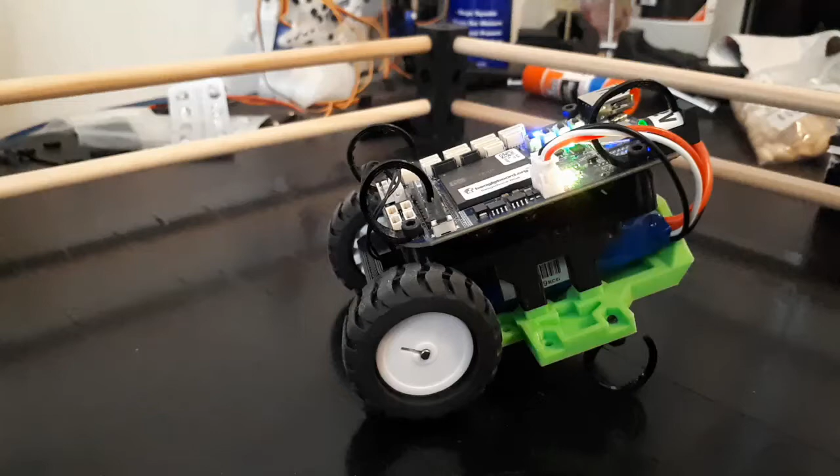Hey, so today I'm going to do a control test on this robot I've been working on for quite a while. So this robot's a pendulum bot, and what that means is the idea is that it's going to try and balance itself in an upright position. So this pendulum, and there's a few challenges with doing that. But today I'm just going to show you some really basic proportional control that I've been working on for quite a while.

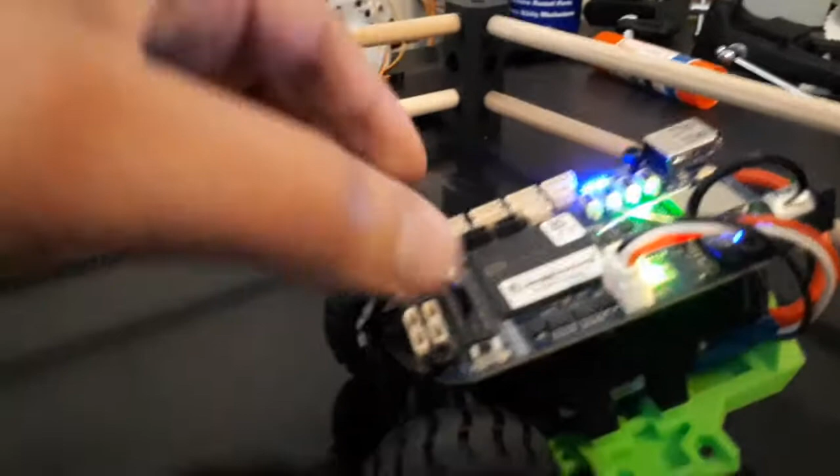The robot's based off a BeagleBone Blue, which is basically a little Linux computer with a bunch of robotic outputs. It's got an IMU on it, so it gets gyroscopic, accelerometer, and magnetometer sampling from that. And because it runs off Linux and it's kind of from the open source community, there's a lot of nice Python libraries that go with it. So most of the code base that I've written for it is all Python based.

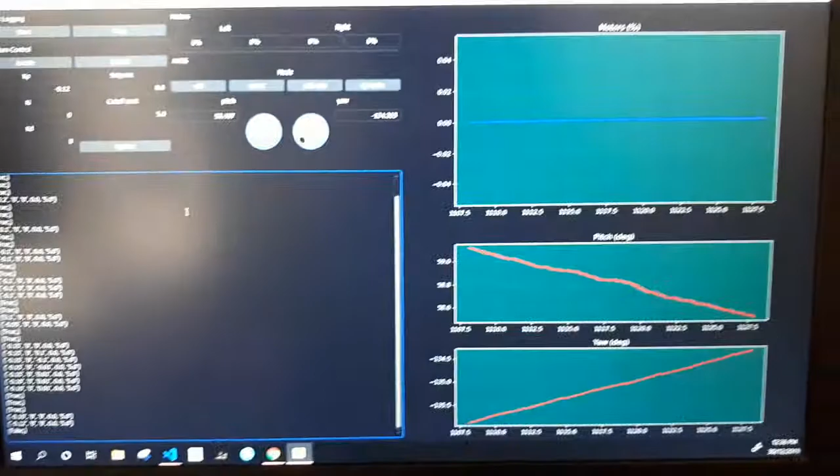So the first thing I'll show you is this nice kind of Python GUI that I've got going here. It shows in this plot here the motor outputs, which is very useful for comparing against the pitch and yaw angles when we're trying to control it. At the moment, all we're going to be controlling for is pitch. So this is pitch here, and yaw is more in this direction.

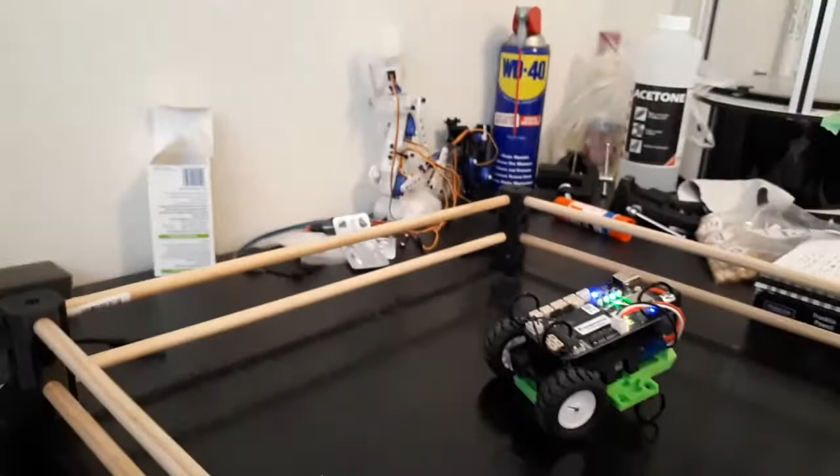There's some really nice kind of Cartesian mathematics that I've put into it with some matrix transforms and so on to make sure that whatever angle this is at, for example, it always knows what its yaw angle is with respect to the rest of the world. And that's required because the IMU is on the robot itself, so it needs to take into account how it is actually oriented with respect to the rest of the world.

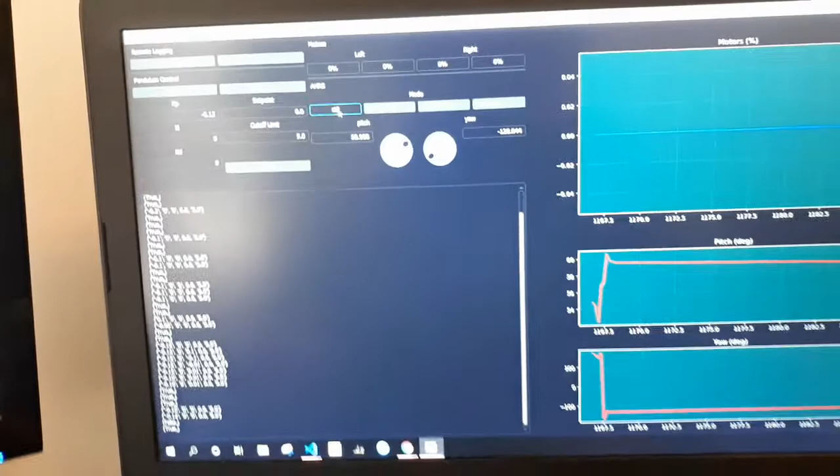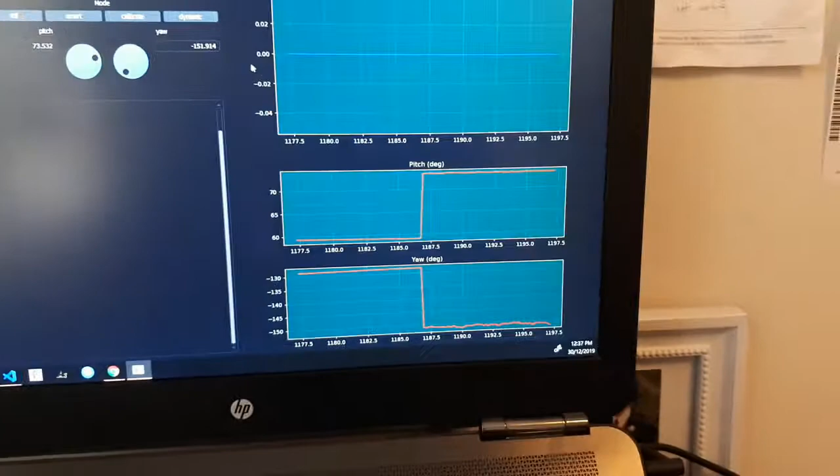And there's a few little modes here for calculating the angles. I've got the still mode, and you've seen here it just jumped, and the reason for that is that in its dynamic mode, when it's actually trying to do some control, there's a little bit of drift, and that's just from integrating over the gyroscopes. So the still mode then goes, hey, I know that I'm still, therefore I can use the accelerometers to determine what my actual pitch is. So it kind of takes advantage of some additional knowledge.

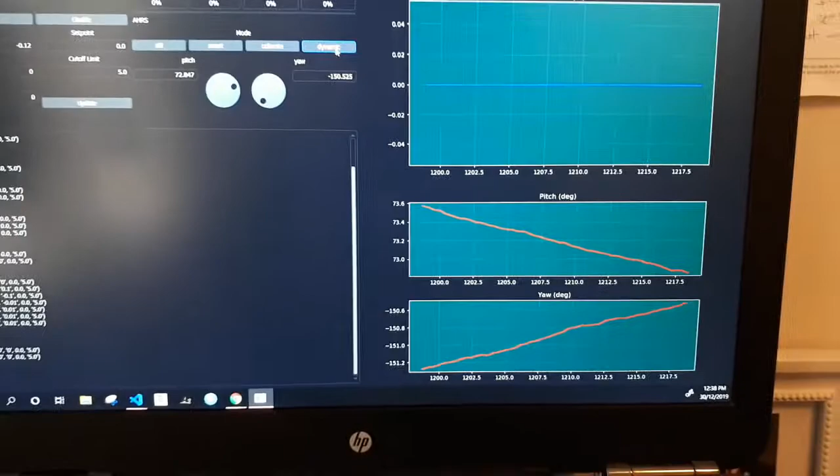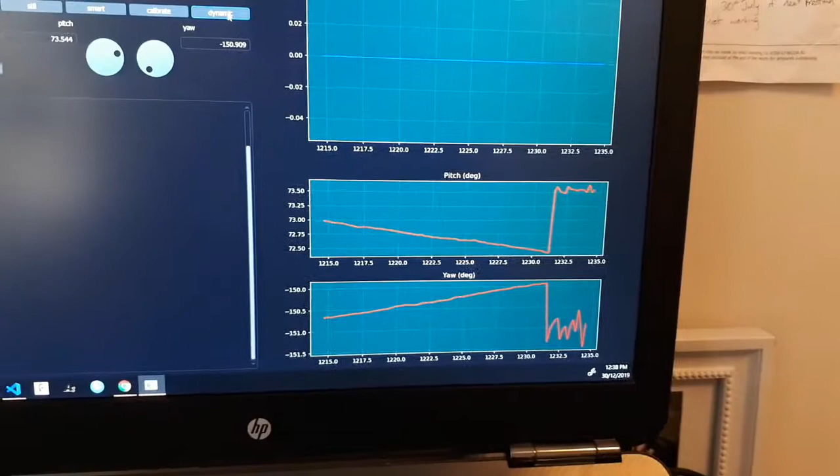So you can see that drift now. So I put it back into dynamic mode, and now it's slowly drifting away from what its true angle is, even though the robot's completely still. And if I put it back into that still mode, it would go there again. So you'll see through some of the tests I do, I might put it back into still mode just to kind of zero that angle in a way.

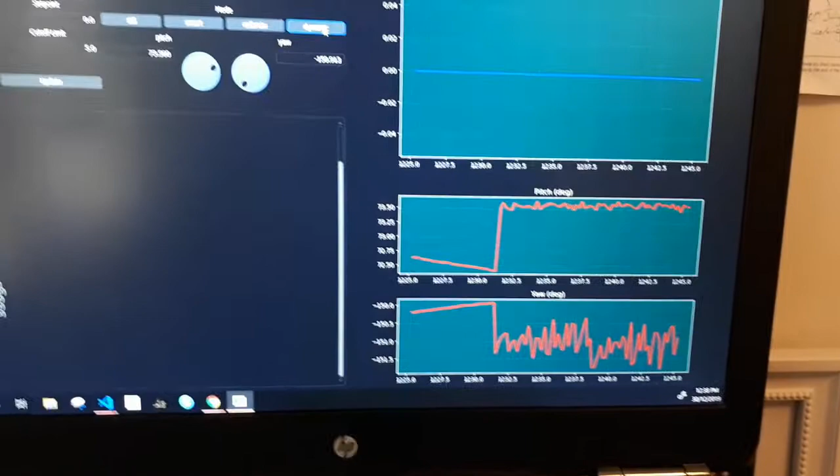And then over here, I've got a bunch of PID control stuff as well. So one of the really nice things with the BeagleBone Blue is it comes with this web-based IDE, which lets you more or less interact with it using an IDE quite similar to VS Code. And it lets you do things like pull code from Git and run it and get some nice general output. So this is basically all being served up over TCP from the robot itself. So not only is it sending all this data over, it's also got a little web server effectively that's serving up data as well. So that's really nice to work with.

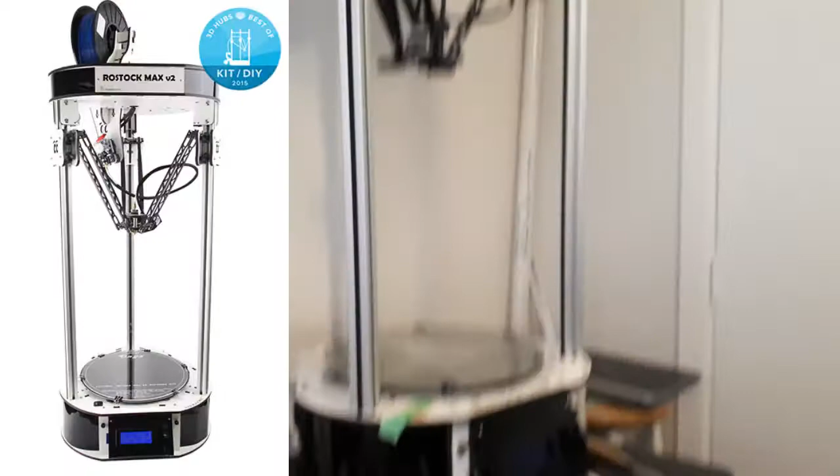Some other cool features of this robot that I'm quite happy with: this whole chassis is all 3D printed. It uses my Delta 3D printer. It's a Rostock Max for anyone who knows what those are. And then I've also designed these little springs here, which are quite important, and you'll see that soon. Basically what I want is if the robot falls for any reason, the control gains are bad, or even if there's an actual software error, then the idea is to offload that energy into the springs rather than having the robot itself smack into the table.

I'd prefer not to damage my electronics if I can, because the board itself costs $100 or so, and then there's other parts too. So these are little sacrificial springs that I designed with the 3D printer to help with that. There's also a software cutout down here, so if the robot goes beyond 5 degrees, it basically just kills the motors to avoid causing any additional damage.

And then obviously this ring that I've designed, again 3D printed, is just to keep the robot within a contained space and not let it fall to the floor and cause any real damage to it. Alright, so with that being said, we'll try some control tests. So this is like the first,

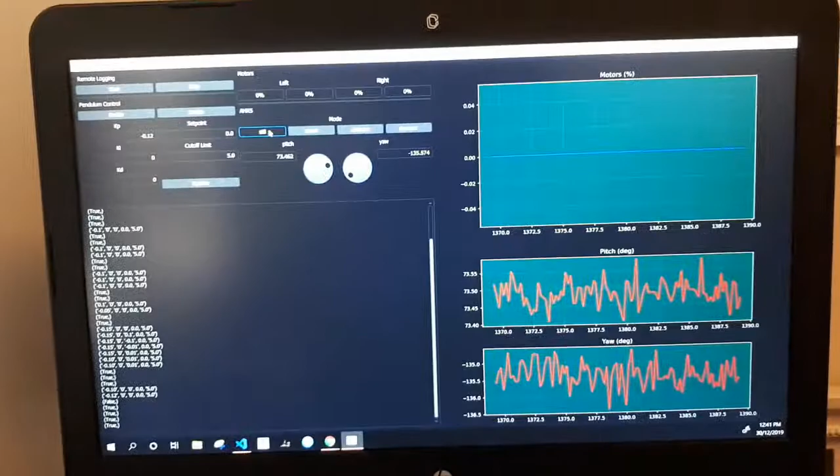I've been programming this control and running it in simulation for a couple of days now, but this is really the first time I'm trying to get it into action, and hopefully we can get something a little bit cool out of it. Okay, so it should be now ready to do some control. So I'm just enabling the control over at the GUI there, and let's see what happens. Alright, so the wheels are moving. Okay, didn't go too far that time.

Alright, okay, so it's trying to hold position and it falls over. So at the moment it's proportional only. I'm not going to attempt to do any tuning in this video, but you can see it's trying to hold a position. Unfortunately, the control loop on this robot's running at 50 Hertz, but with the sudden falls, it will miss some points in the gyro sampling. So it will lose some accuracy with basically these fast changes in angle.

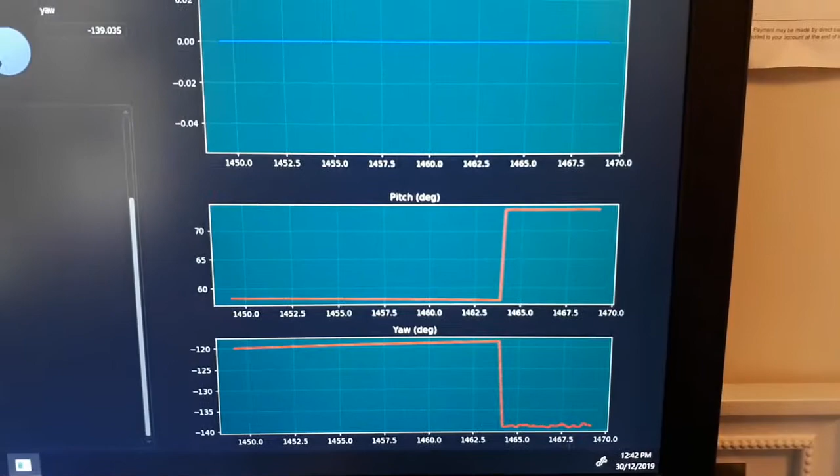So because of that, coming back to here with the drift, I'll put it back into still mode so that it uses the accelerometers again to calculate the pitch. And you can see just even in that short amount of time we lost about 20 degrees. And so since we're only sampling this at 50 Hertz, and some of these dynamics, especially those little springs, are going to be outside of that bandwidth, we are going to get a loss in accuracy when we try and integrate over that data, because some of those dynamics won't get captured.

Alright. Yeah, let's see if we can get it doing any more control. It seems to be pretty adamant to fall over in that direction at the moment. Okay. Yeah, that seems to be a little bit off. It's saying that that's around the 0, which I don't think is true. Yeah, let's try zeroing that again. Yeah, it just said it was off by 10 degrees from that point, so no wonder we're getting weird control out of it. Alright, one more time.

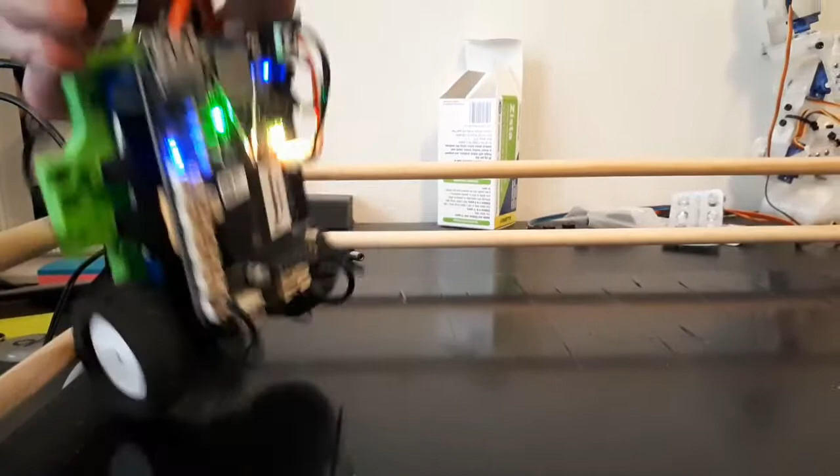Oh, okay. Alright, let's try turning it around. Maybe it'll do a little run for us. Nope. Okay. This integration really isn't working well for it, I think. We'll try putting it into still again, and then go back to dynamic mode. Okay, no, it fell over. Alright, I think we had more luck in the first run, unfortunately.

Alright, well, what I'm hoping is to play around with this a bit more, and it's got some additional features that I've added to it, like high-speed logging, where I'm getting that data out at that 50 Hertz rate, and that'll allow me to do some more serious analysis. That's pretty much it for now.